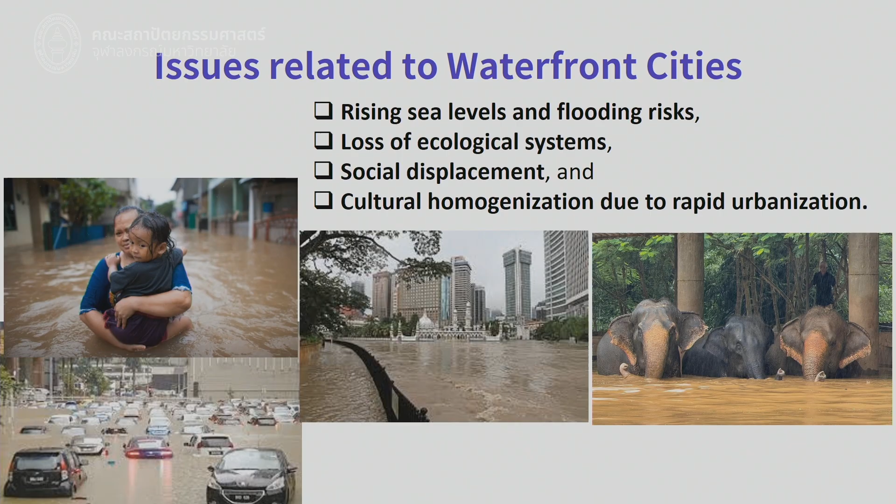This is also in Kuala Lumpur, showing what happens during flash flood season and whatnot. We are very close, our heart is close to this animal and ecology, but they are also affected by these issues related to rising sea levels.

In that case, we are here to discuss understanding urban resilience. What does it mean? It's not an optional ideal, but an essential framework to ensure our waterfront remains livable, adaptive, and culturally grounded. I think this is the great challenge we all face in making it culturally grounded, while at the same time adopting modernization and successful projects elsewhere in the globe.

We started with the urban resilience definition, which refers to the capacity of a city to absorb shock and adapt to challenges, ensuring sustainability and well-being among the urban population. There are three dimensions related to resiliency in urban areas: social, economy, and environmental. These are the key pillars of the Sustainable Development Goals, all contributing to the ability to recover from crisis and thrive in the long term.

But Chatuchak is actually very big. The flea market is where the community will have their own jumbo sale of their belongings and whatnot at a very reasonable price. So that is about transforming or making the spaces robust. That is design flexibility.

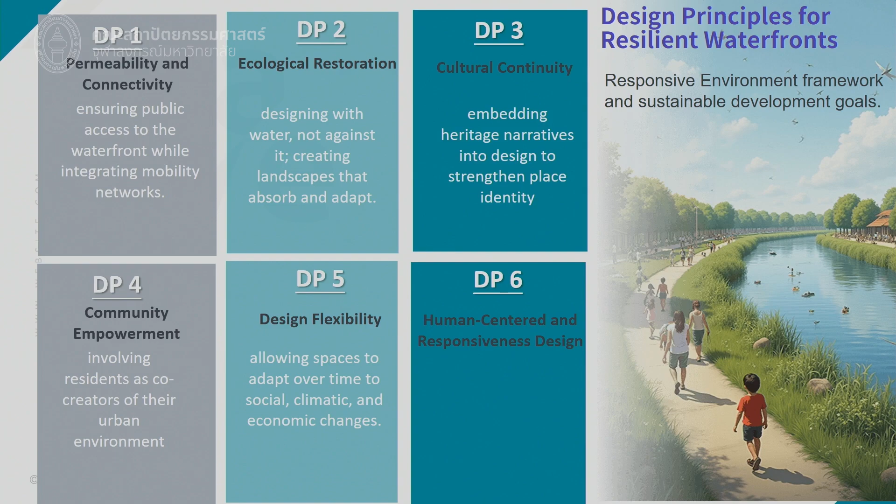Last but not least, it's about human-centered and responsive design, which relates to the architectural approach of building design, whether you are designing a pavilion or just a pathway. Climate and human-centered design, and how people actually utilize the spaces, is the utmost important component. This is the successful component in making Waterfront City.

Are we able to describe about 5? Actually, if we discuss it further, we could have a list of up to almost 10, but I think these are the most important.

So basically, vibrant public realm. This is when we talk about public realm, which integrates water as a central element of urban life, connectivity accessibility in the city. Public realm again, making spaces, placemaking, and so on and so forth. This is about making public life, urban spaces as public life.

You are creating public spaces as an urban living room. Like here sitting, like a living room, you have a very nice couch or sofa in the house indoors. Similarly, when you are in the outdoor spaces, you need comfortable spaces where you can stay longer, not just 5 minutes outdoor before getting into the building. We want everybody to stay outdoor longer.

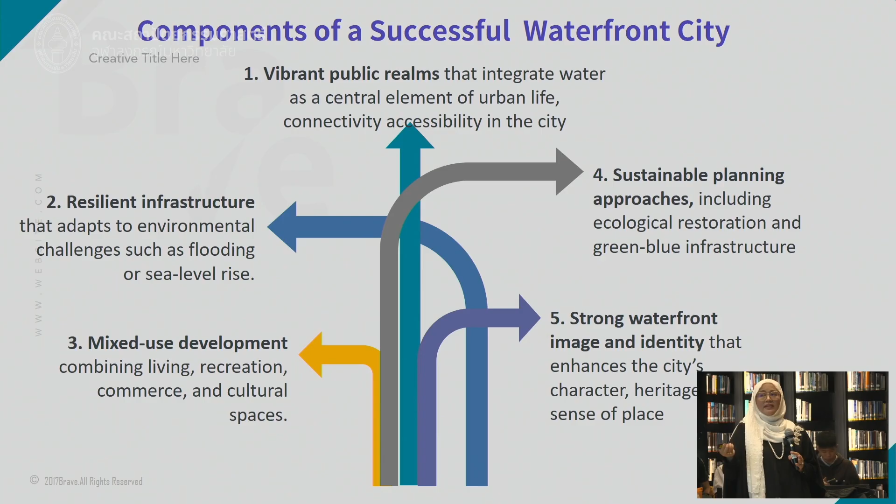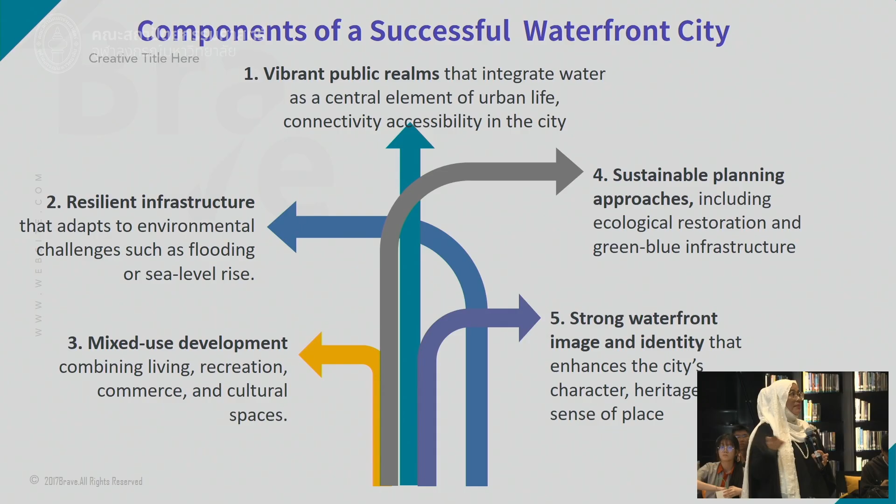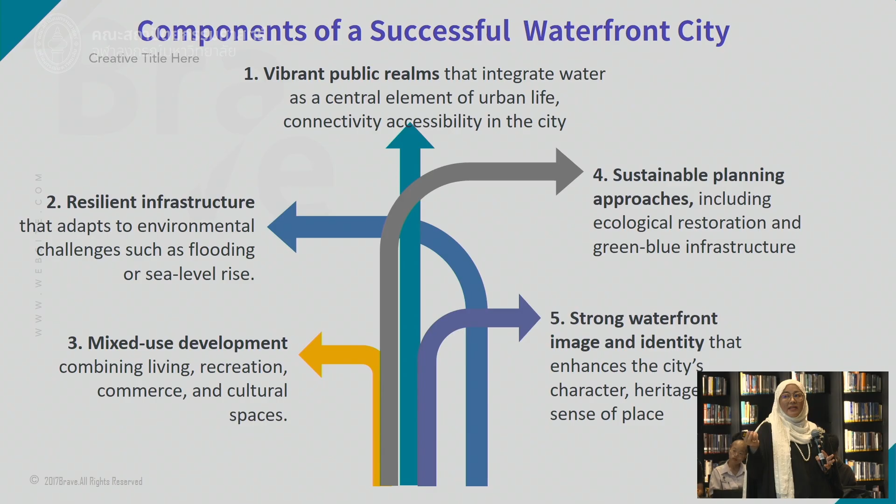I think this is another key thing that retains the heritage or community value. So the image and identity of the area actually differs. Later, I'm going to show you a different approach from different cities, giving you a way to recognize the waterfront based on image and identity of the place.

Just to share with everyone, perhaps most of you understand this already - this is about urban design concepts and elements for public realm. Since we are doing a related project, I'll introduce this, as some lecturers here understand it. This is about the components that help you not get lost in the city, part of understanding image and identity that gives character to places. So I will start with this one, which is path.

The area is characterized by the path. Like I mentioned, when we walk from the hotel to the Faculty of Architecture, we walk through the path, which has a canopy of trees giving a very unique image of Chulalongkorn University. And we bump into a heritage building on the other side, giving us the impression that this is really an old university holding the prestige of education in Thailand. That is how the path brings in your feeling and emotion while walking through it - it's not just a path, but has its own character and identity representing Chulalongkorn University.

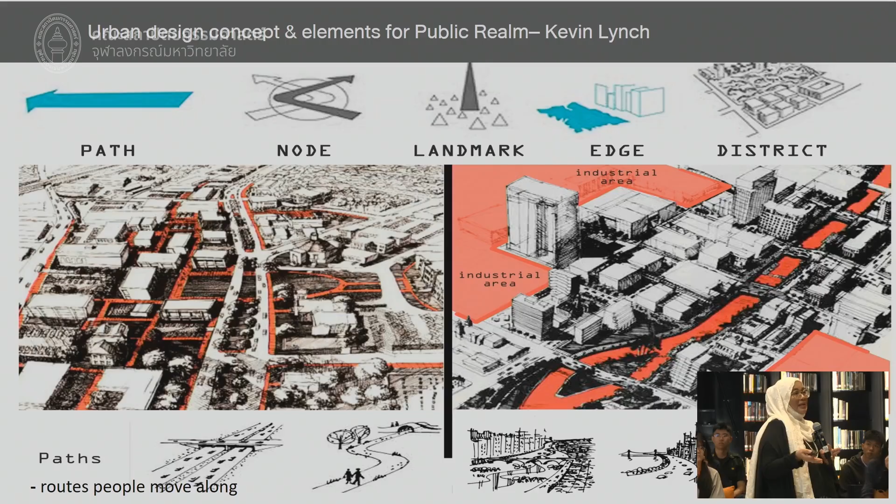Landmark - definitely, when we went to the temple, that is really a landmark, and also Santa Cruz Church is a great landmark. With that particular landmark, students can create a pathway or vista towards it, so that the journey is enhanced - even when you are at Kudijin 9/1, you can get into the main path and have a vista towards the Santa Cruz Church.

Edges are also important, defined by the river or the edges of the building facade. You can see how the building facade gives an architectural language, communicating with you while walking through the pathway. That is about edges.

And district - Kudijin is actually a district. In urban planning, a district is defined by population numbers, but in urban design, a district is a much smaller area that covers the characteristics of the area through several components like senses - smell, hearing, somebody doing something, somebody selling ice cream at their doorways. Those senses come along with the district and really create the image and identity of the Kudijin community, or district.

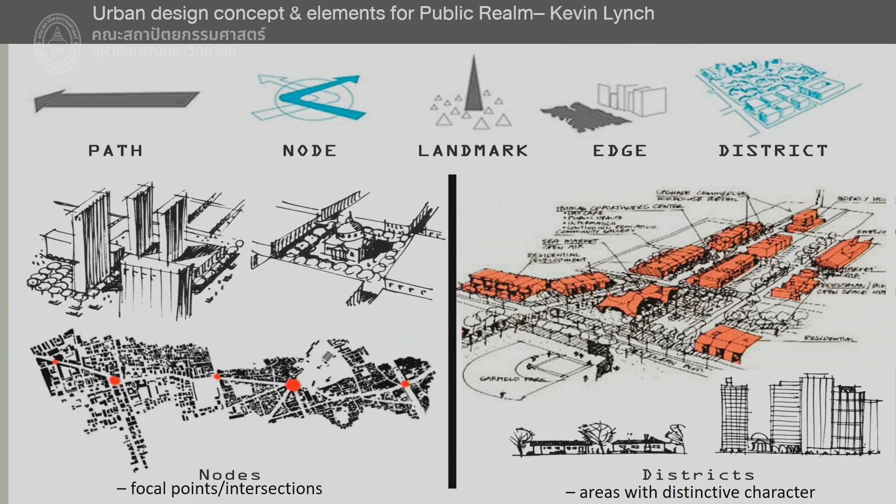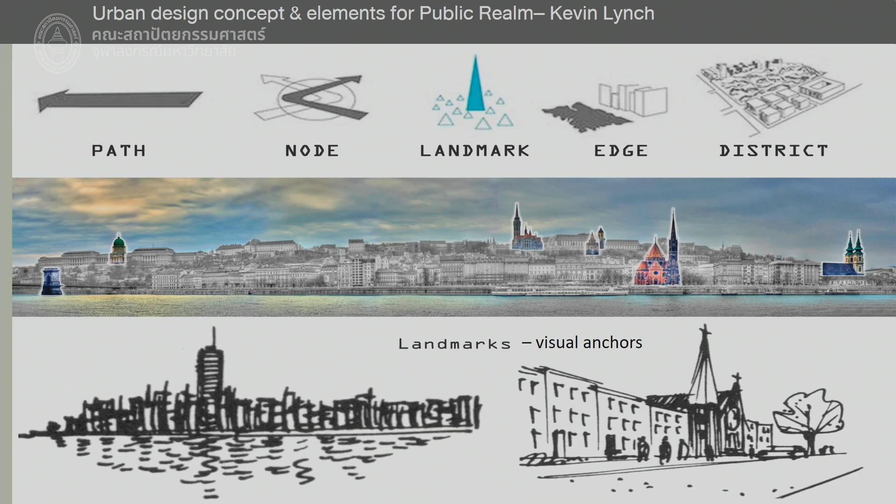I'm going to share with you some of the best practices of successful waterfront revitalization. Like for example, this is Salford Quays, Manchester, urban regeneration, which is not that far from Old Trafford, for those who are Manchester United fans. I've been living here for about 4 years while doing my PhD.

This is actually about Salford Quays, which is very derelict. When I visited the first time, back in 1994, Manchester and Glasgow, I felt it was too gloomy, everywhere was colored in gray. That's because this was the area where the import-export harbor was, where they produced and exchanged cotton, and where the clothing factories were happening. And now they've already transformed this.

So when I visited Manchester again in 2008 and stayed there for about 4 years, this is what it has been transformed into. It's really amazing how they transformed it, making it much more vibrant, transforming a derelict industrial area into the vibrant waterfront hub known as Media City. This is the canal that they made and programmed for canoeing and everything, and this is a light festival in the area, and part of the housing.

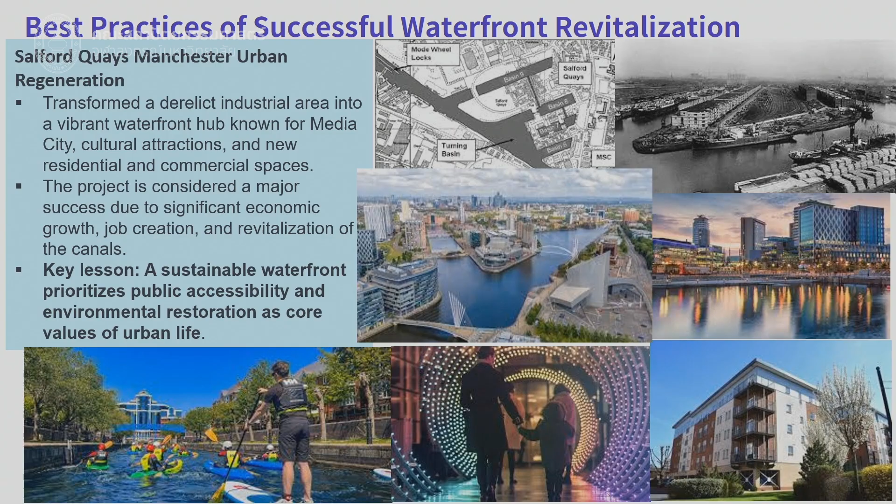So this is actually a consolidation of all the 5 components we mentioned previously, including the housing as well, so it needs to have people living in this area. The key lesson we can take from here: a sustainable waterfront prioritizes public accessibility and environmental restoration as core values of urban life.

So you may need to describe it in this manner as a designer. Everyone, are you all still with me? Alright, okay, good.

Next is about Singapore Marina Bay and the ABC Water Program. Singapore Marina Bay represents a visionary integration of urban design, water management, and environmental stewardship, where the government has this Active, Beautiful, Clean Waters, ABC Waters Programme. Singapore transformed the canals and reservoirs into vibrant, multifunctional spaces, uplifting well-being, health, and ecology, creating harmony between people, nature, and water.

This is all the development along Marina Bay, and these are all the famous buildings, a must for tourists to visit. This is places of interest, and these are the activities. When you provide all these spaces, the question is whether they're payable - if you just walk around here, it is actually free, unless you go to the Gardens by the Bay. And these are all the activities, so the spaces need to be transformed into places for everyone.

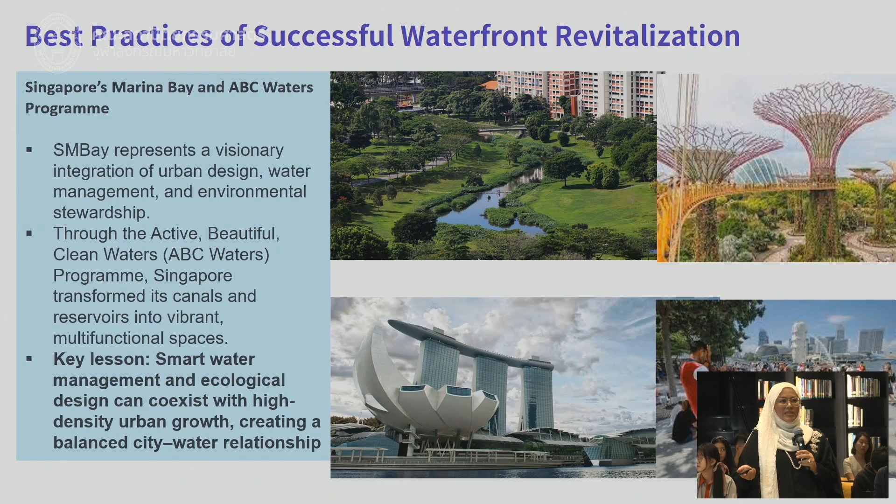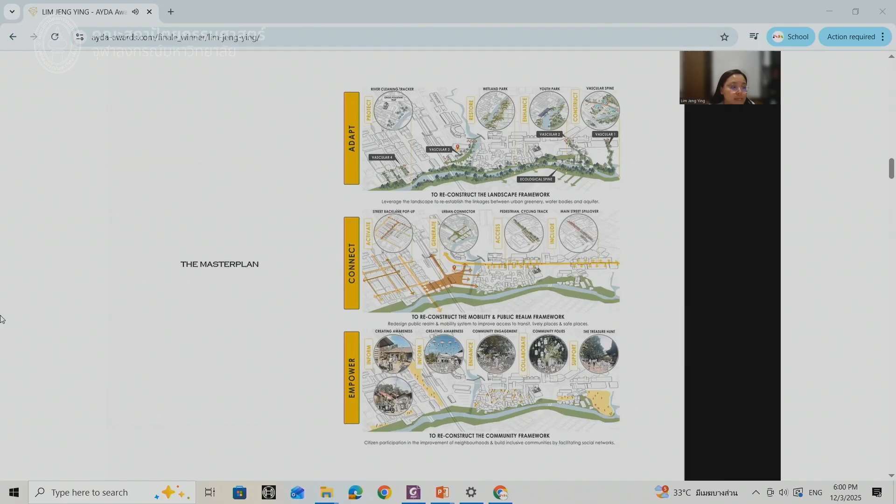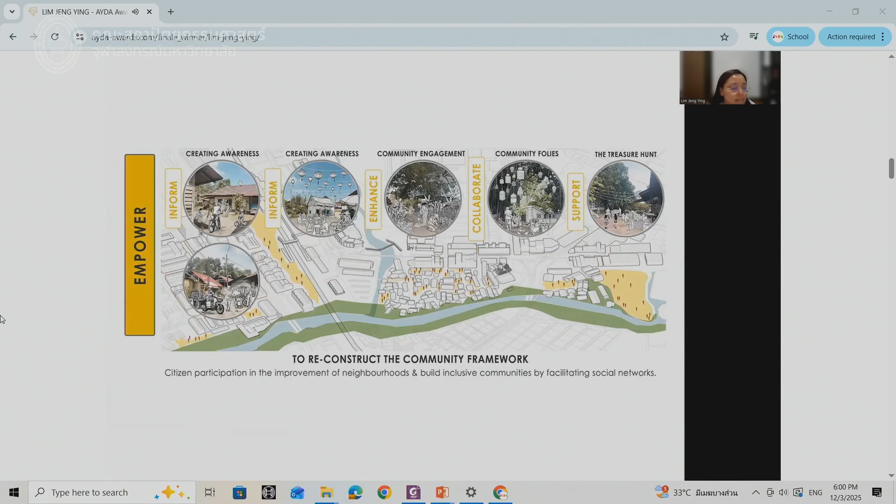So the whole design process actually started from a macro view with a master plan, with the concept of adapt, connect, and empower. Adapt is to reconstruct the landscape framework. Connect is to reconstruct the mobility and public realm, and empower is to reconstruct the community framework.

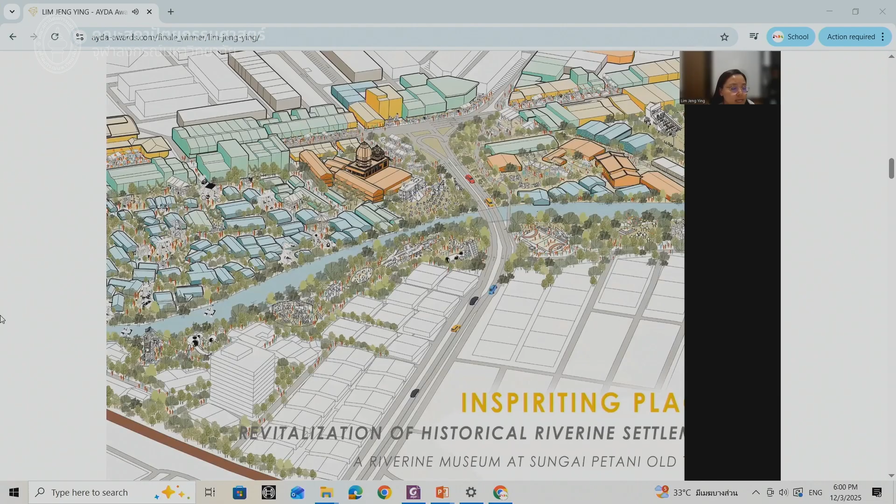The site is chosen at the convergence of the old town and the new town, the convergence of the past and current, and the convergence of nature and the built environment. This is where the river flows and the railway passes through. It will be an urban connector that connects all directions.

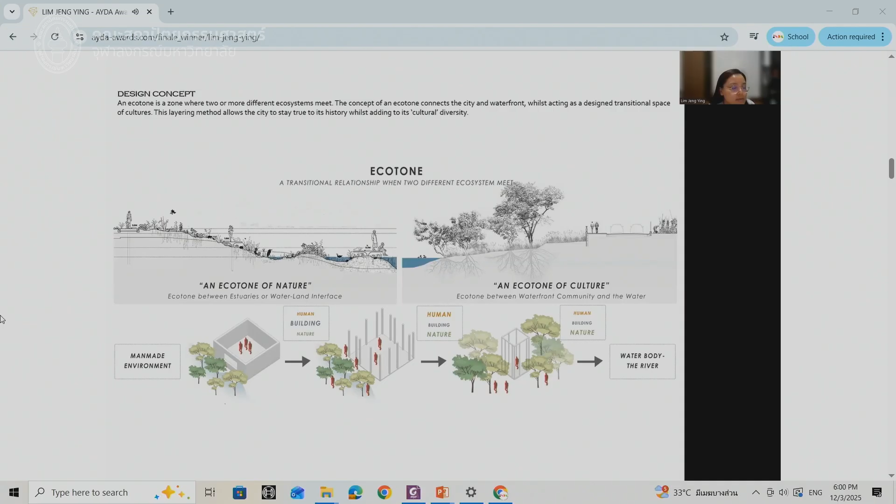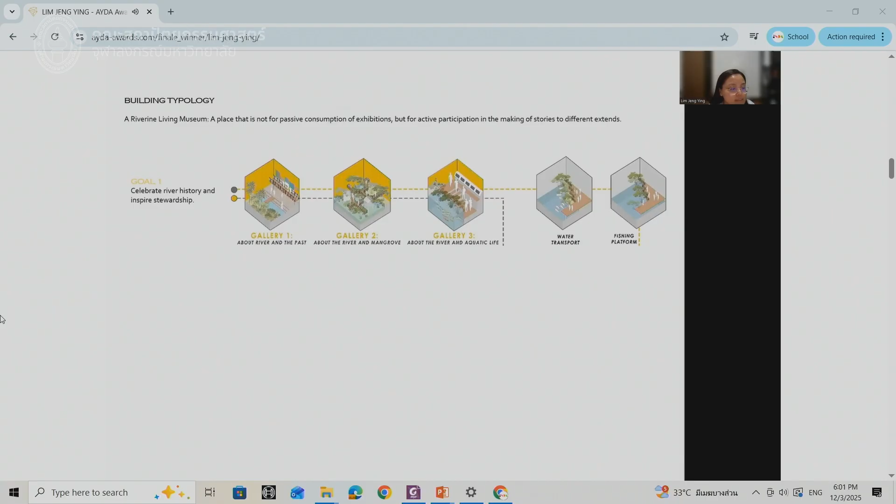The design concept is ecotone, a transitional relationship where two different ecosystems meet. The ecosystem I refer to here is the ecotone of nature and culture. It is where nature and the built environment meet, and also how humans reconnect back to the water bodies. It is a riverine living museum to celebrate the river's history as a welcoming venue for learning, enjoyment, and community gathering. And most importantly, it is to foster innovations in the community.

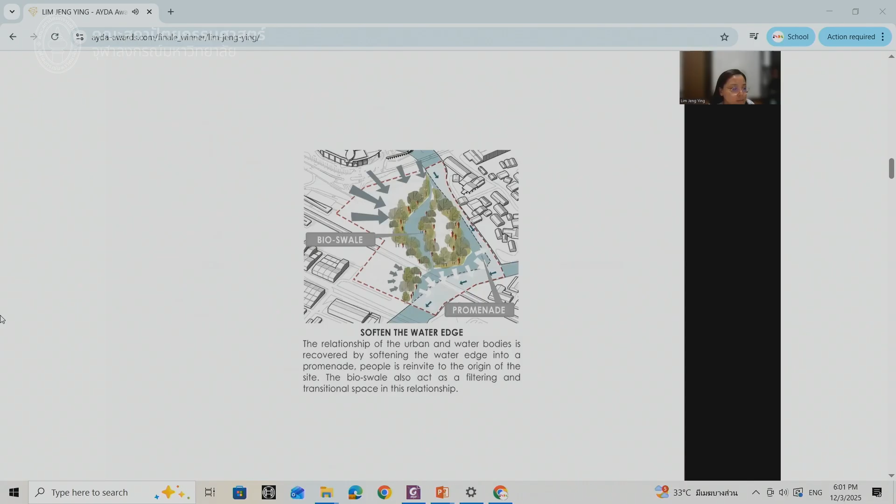The design strategies begin by solving the issue of the contrast relationship between the built environment and the water bodies. This is to soften the water edge by creating a promenade. The bio-swale will help to filter and act as a transitional medium.

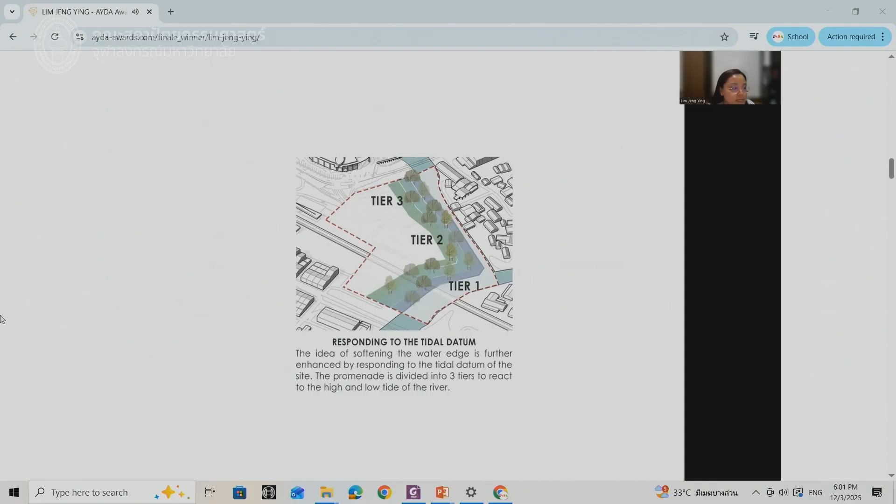And this relationship is further enhanced by responding to the tidal datum. The promenade is divided into 3 tiers to react to the high and low tides of the river. And it is to create an urban connector. Connection between the old and new town of Sungai Petani has been restored with a new pedestrianized green gateway.

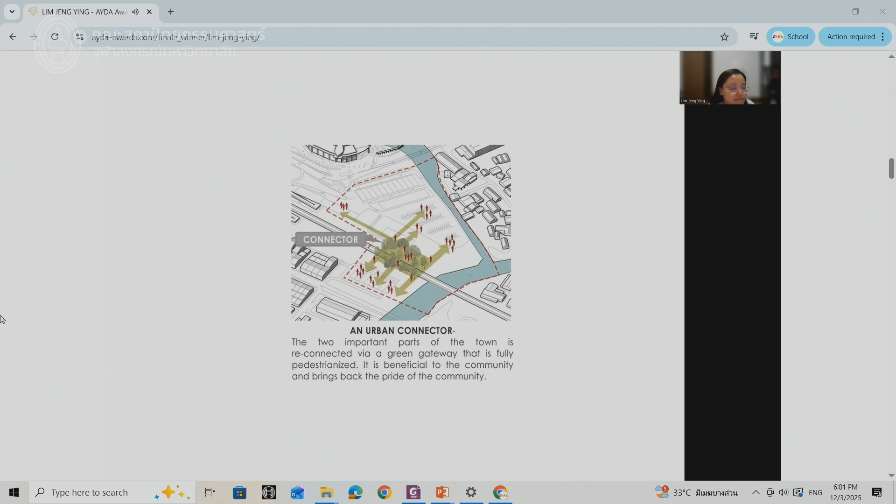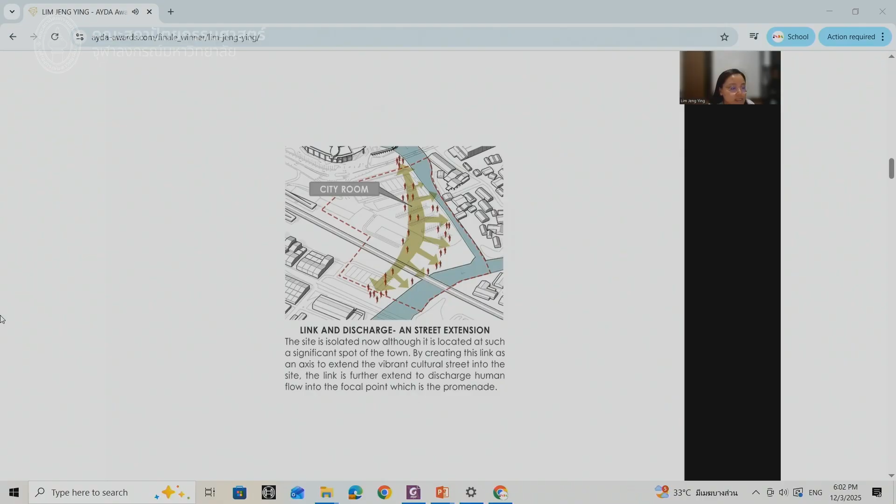And although the site is located at such a significant spot of Sungai Petani Old Town, it is actually isolated. The idea is to extend the existing vibrant cultural streets into the site by creating an axis in order to discharge human flow into the nodes of the site.

And in the ideations of creating a distinctive frontage experience, there are 2 frontages at the site. The north, from the main street Jalan Kuala Ketil, is to create a welcoming sense and encourage an informal greeting through a community park before entering the living museum.

And on the other side, through Jalan Ibrahim, it is to create a sense of distinctiveness as the existing landmark of Sungai Petani is located along the same street. The idea is not to overshadow the landmark. An urban void is created to increase the permeability that tones down the entrance here.

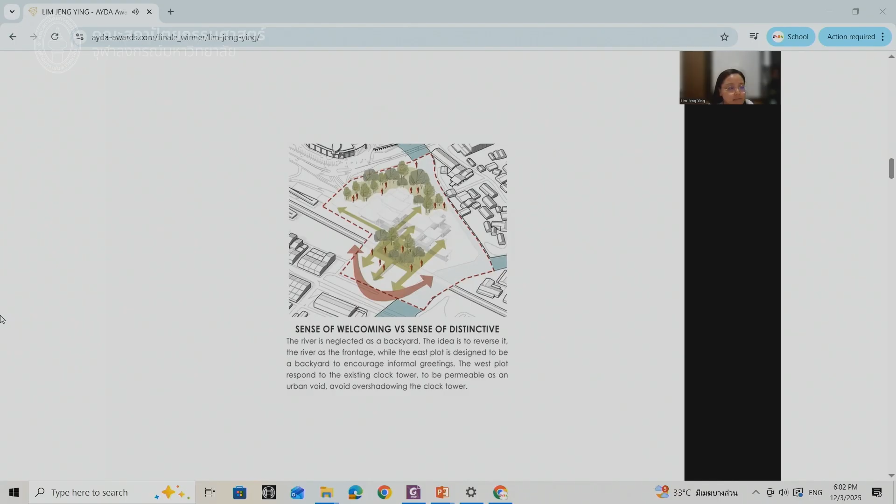And the building massing and height is reduced gradually from inland to the river. The building mass is fragmented in a way to mimic the nature of how mangrove wetlands reconstruct naturally, always starting at a few points and spreading.

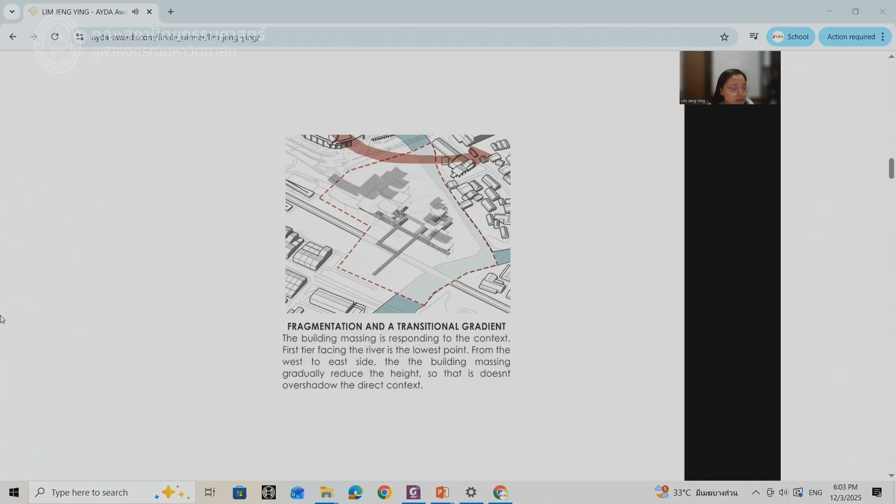And the whole design idea is inspired by the idea of Da Bo Pang, which means a temporary cloth shed that is built by the local community themselves. The idea is to bring back these memories of the local community. When they see the temporary cloth shed, they are reminded of the sense of welcoming and sense of gathering.

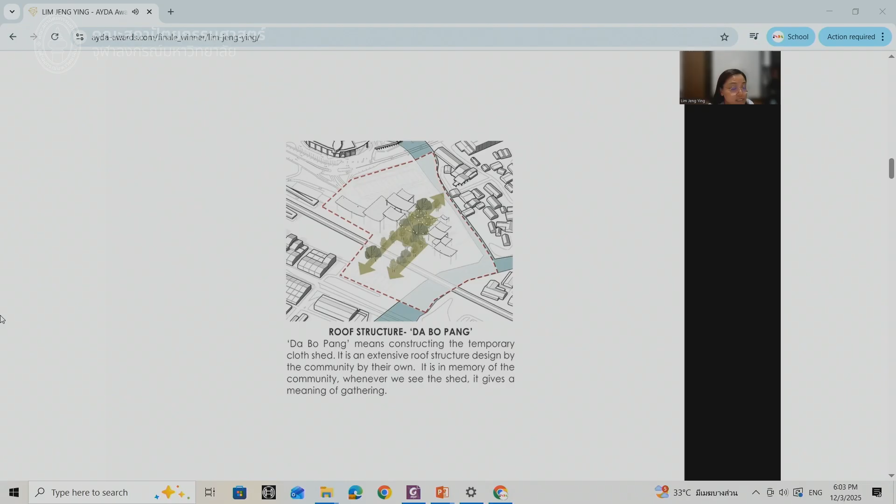The roof is lifted, pushed, and touches the ground, split to create different volumes that create a distinctive experience. And the whole spatial experience is further curated based on a choreographed timeline of riverine experience with a phenomenology approach.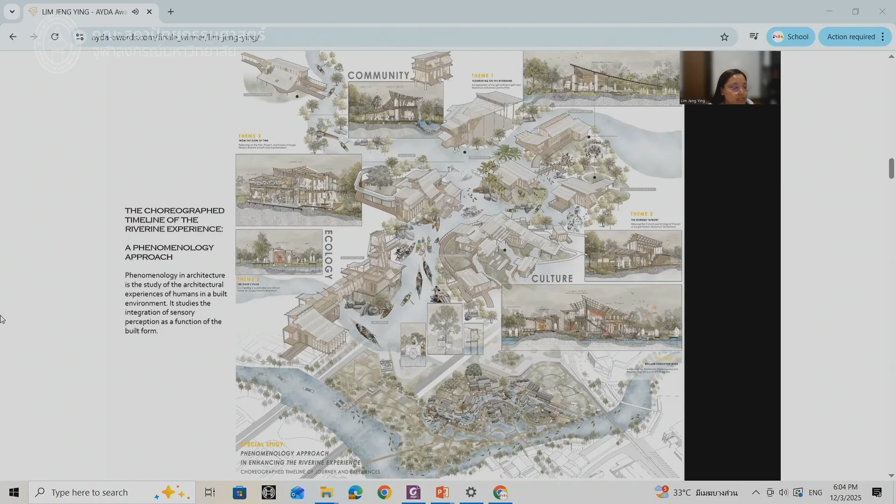By crafting the spatial experience, the design aims to evoke a sense of wonder, nostalgia, and cultural richness, creating memorable encounters that establish deep emotional connections between the user and the built environment. And so, the story begins.

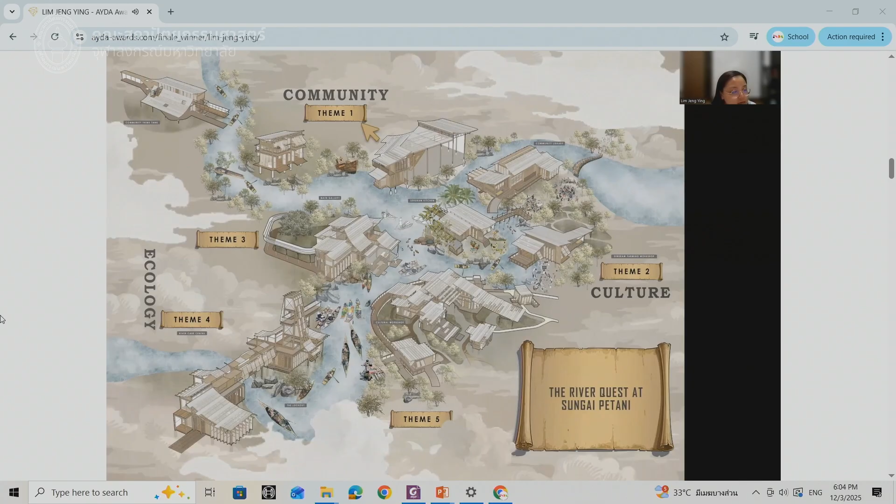It consists of a series of living museums and galleries arranged around the central theme of the biosphere, further zoned into three: community, culture, and ecology. It is curated into five themes to curate the riverine experience.

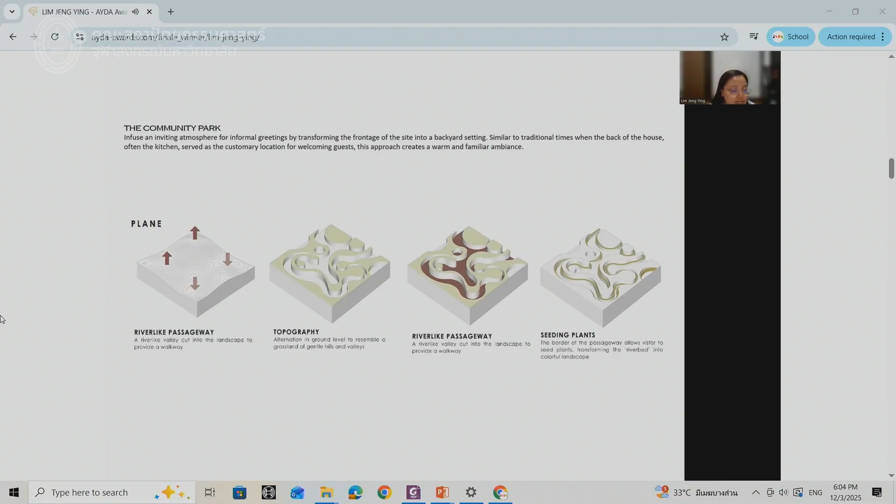Theme 1 is about flourishing on the riverbank. From Jalan Kolakatil, the main entrance leads into the community park, a series of river-like valleys cut into the landscape creating passageways. At the border of the passageway there are planters allowing visitors to plant, and over time this border turns into a colorful landscape, further crafted into high narrow play, low wide riverbed, and overhead cave.

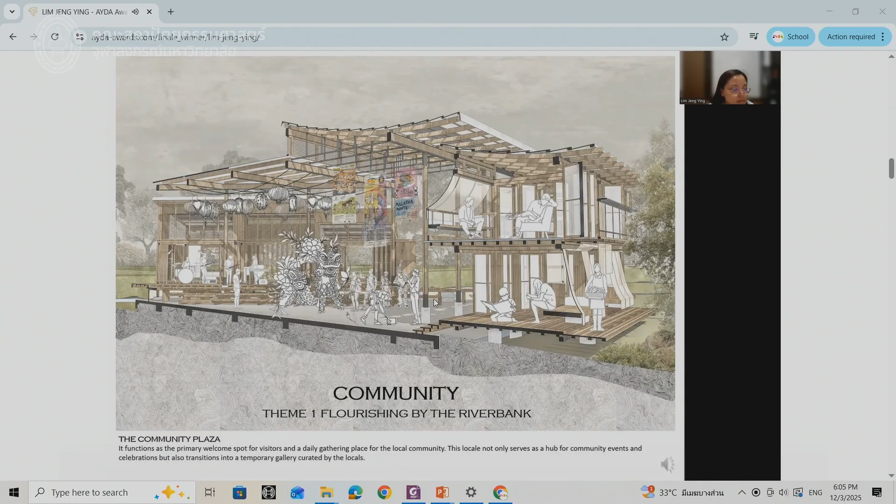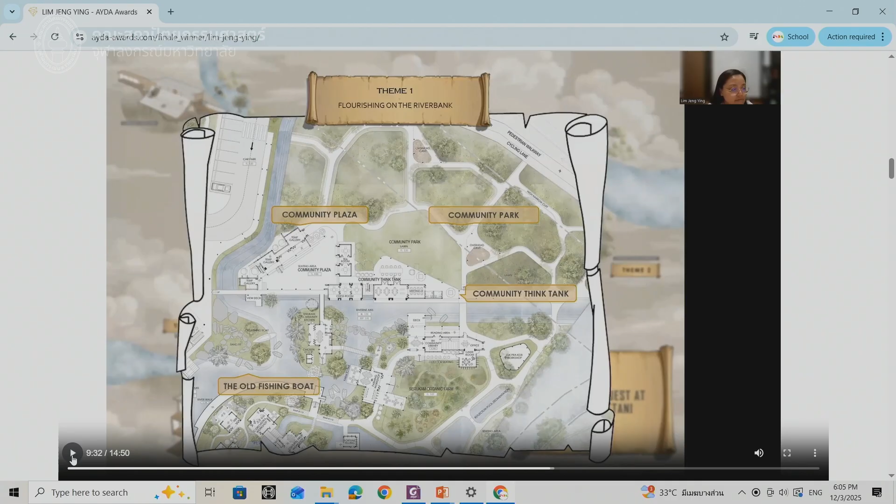From the community park you enter the community plaza, which functions as a primary welcome spot for visitors and a daily gathering place for the community. It serves community events and celebrations, and also transitions into a temporary gallery curated by locals. Further into the plaza there is a community think tank managed by young individuals who have recently returned to their homeland. I'll provide a link so everyone can further explore the design, especially how it creates harmony between ecology and humans, and its cultural devotion.

Can I get back to the slide please? Okay, so that is about my knowledge sharing with everyone. Khop khun ka, thank you, terima kasih.